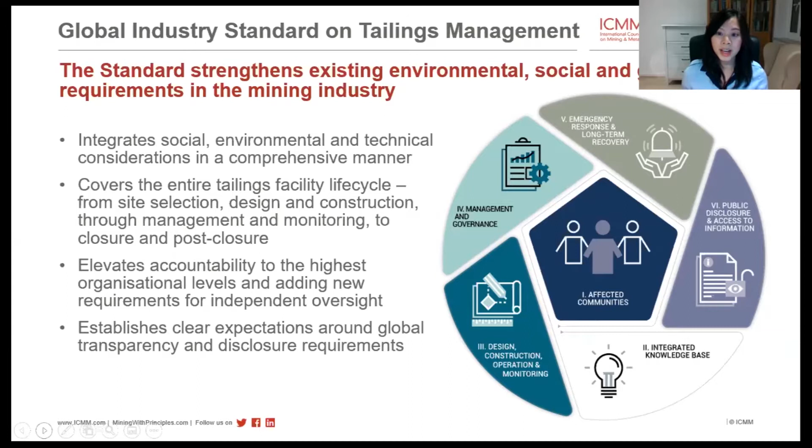In essence, the standard strengthens existing environmental, social, and governance (ESG) requirements in the mining industry by integrating social, environmental, and technical considerations in a comprehensive manner that will be new to a number of regions. It covers the entire tailings facility lifecycle, from site selection to design and construction, through to management and monitoring, and to closure and post-closure. It elevates accountability to the highest organizational levels, adds new requirements for independent oversight, and establishes clear expectations around global transparency and disclosure requirements, helping to improve understanding by interested stakeholders.

The co-conveners, having all endorsed the standard, will call for broad and effective implementation of it. For us in ICMM, it will be integrated into our existing member commitments, which includes third-party assurance and validation. Our members have signaled the commitment that all facilities with extreme or very high potential consequences will be in conformance with the standard within 3 years of the launch date, so 3 years from August this year.

All other facilities will be in conformance 5 years from August this year. Meanwhile, UNEP will support governments that wish to incorporate and build upon the standard into their national or state legislation and policies. And the Principles for Responsible Investment, which represents some $100 trillion in assets under management, will also be developing investor expectations to support companies in implementing the standard. So it's our hope and ambition that it will not only be implemented by ICMM member companies, but that it will be much more widely adopted across the world.

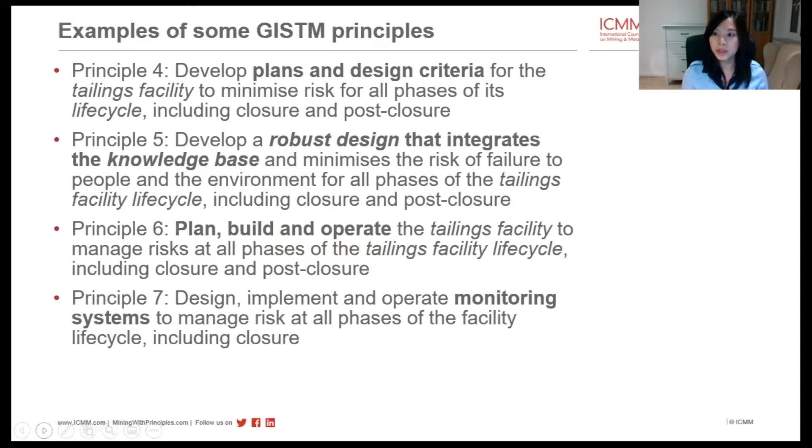I hope this gives a helpful, informative overview of the standard, and it should also be a good segue for us to think about the challenges and opportunities raised by some of the requirements of this new standard. That's all from me, and back to you, Paul.

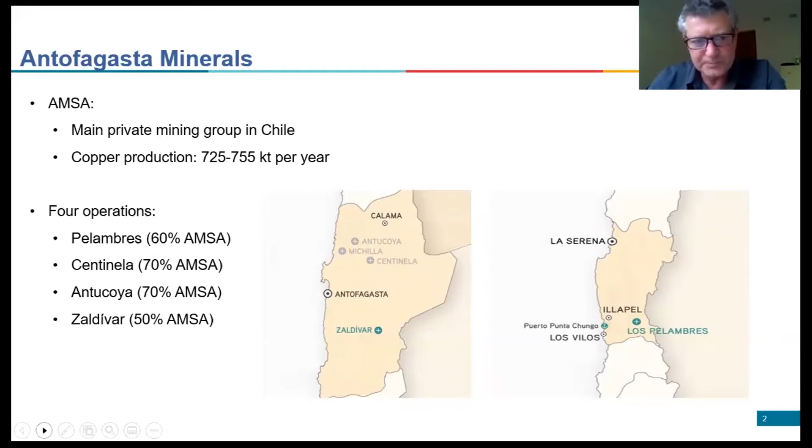Quillayes is an older tailings facility, ultimate capacity of 400 million tons. It is a cyclone sand dam. It is currently inactive. It was built with the downstream construction method and currently has a maximum wall height of about 200 meters. It's not going to go any higher than that. It's currently inactive.

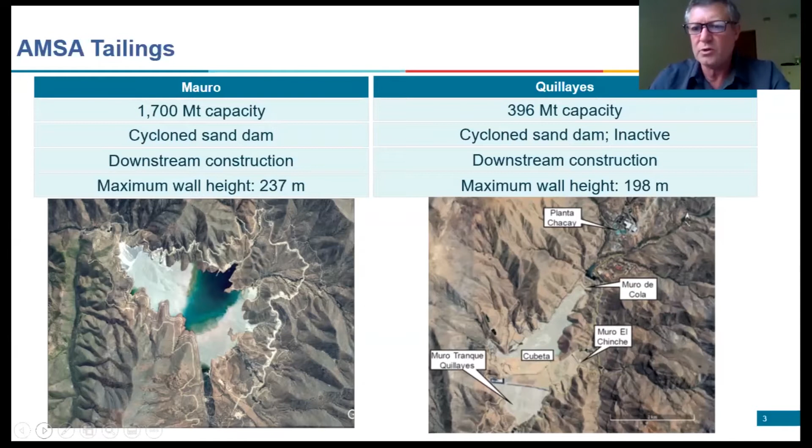Obviously, the mine is operating, and it does have an operating tailings facility called Mauro, which is on the left. Mauro has an ultimate capacity of 1,700 million tons. It is also a cyclone sand dam built with the downstream construction method, and will go up to an ultimate wall height of 237 meters. This is a significant height - close to world record heights for a cyclone tailings dam. It's not the world record - it used to be, it's not anymore. But it's pretty high up there, and obviously that carries its technical challenges.

The next facility, as I mentioned, is Centinela. This facility has an ultimate capacity of 750 million tons. It is the largest throughput thickened tailings facility in the world at 95,000 tons a day. Containment is provided by two dams - a main dam and a secondary dam. The main dam is a rockfill dam. The secondary dam is an earthfill dam. You can see here in the front the main rockfill dam. Both dams use downstream construction, and the main dam, which is the largest, has a maximum height of 80 meters.

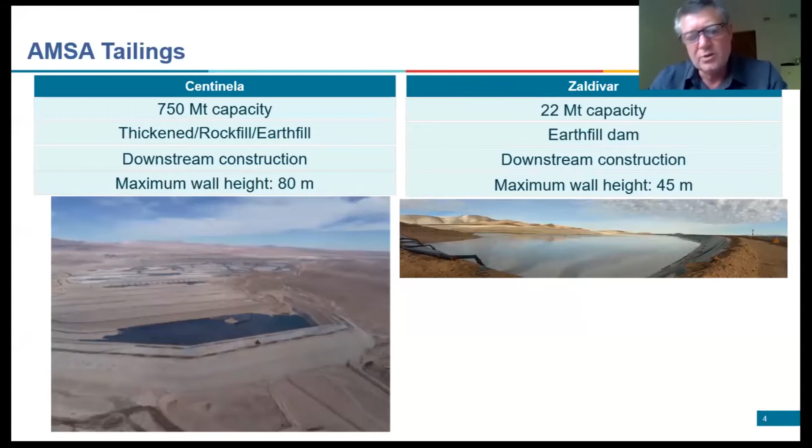I list here the main challenges that we see that are derived from the new standard. I'd like to say that AMSA participated significantly during the development of the standard,

and now obviously during the implementation. AMSA is a member of ICMM, and as we heard from Diane, we have a commitment to be in compliance within 3 years for our critical facilities. The two first that you saw, both Mauro and Quillayes, are critical facilities due to their height and how close they are to communities. So those will be in compliance in 3 years. The other two, Centinela and Zaldívar, are not critical, so we do have 5 years there.

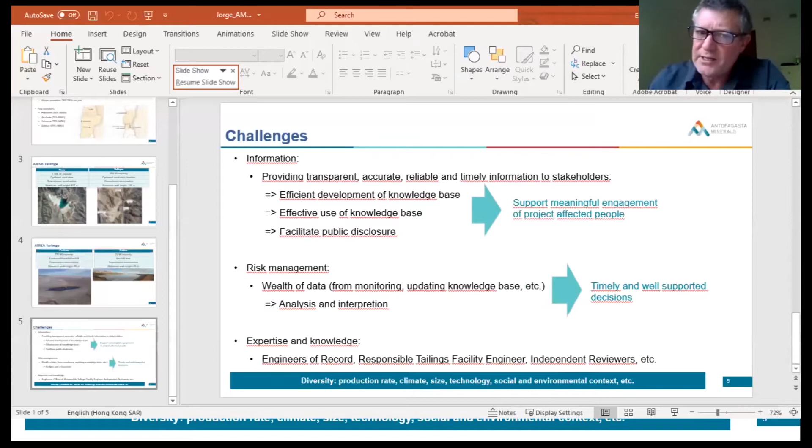But we expect to hopefully have all four of them in compliance within 3 years. Having said this, I'd like to indicate that I think most major companies like AMSA, we don't see major challenges in implementing the technical criteria associated with the standard. Yes, we will have some gaps, but we feel that we're prepared to address those within the timeframes that are established. So yes, there are challenges, no doubt, on the technical field, but we are of the view that these can be addressed, and we have the capacities to do so. And obviously, we welcome input and knowledge from service providers and new technologies to achieve that.

So we do have a challenge, but the biggest challenges are the ones I indicate here. You've noticed that Diane did bring up two main aspects that we see as challenges. The first one is related to information and in relation to transparency. One of the big items of the standard is providing transparent, accurate, reliable and timely information to stakeholders.

The information that is generated from these tailings facilities is tremendous. It's a huge amount of information. The standard requires us to be updating that information regularly, and so to be efficient about how we collect it, how we interpret it, how we analyze it. The standard also asks for updating. So we need to develop a knowledge base. We need to maybe not only develop, but we need to update it.

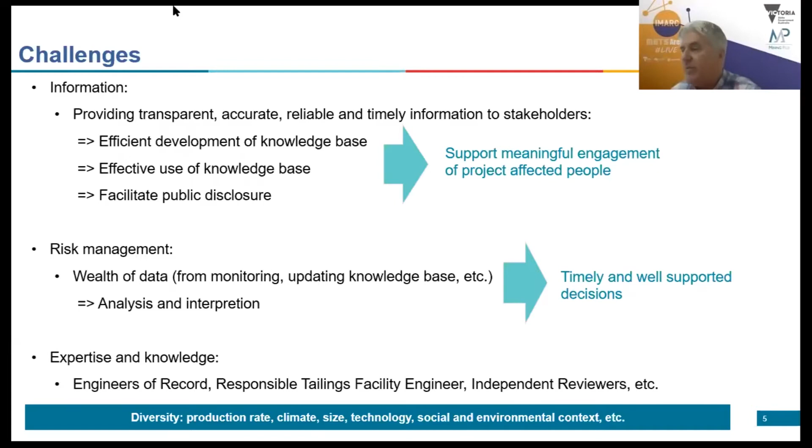The other aspect, and you saw on the 4 principles. Oh, hey, got 30 seconds. Sorry, we've got to run to a tight thing. 30 seconds, please. Yeah, almost done here.

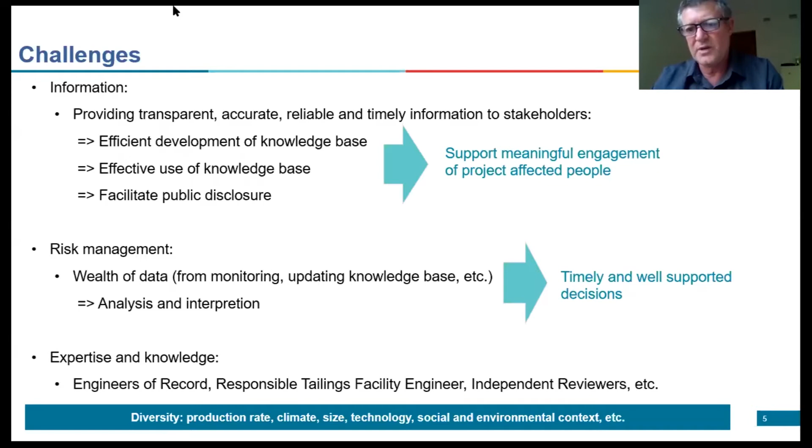As Diane mentioned, the 4 principles that she brought up talked about risk management or minimizing risk. That is another significant challenge that we see. Again, due to the wealth of information, significant amount of information, being able to analyze, interpret that, and pass that on to decision makers. Again, the other thing we heard from Diane is that accountability is brought up to the highest level within the company. So bringing that information in a timely manner, digested and interpreted for those decision makers, very high level decision makers, to make those decisions is also a significant challenge.

That's essentially what I had. Thank you very much, Paul.

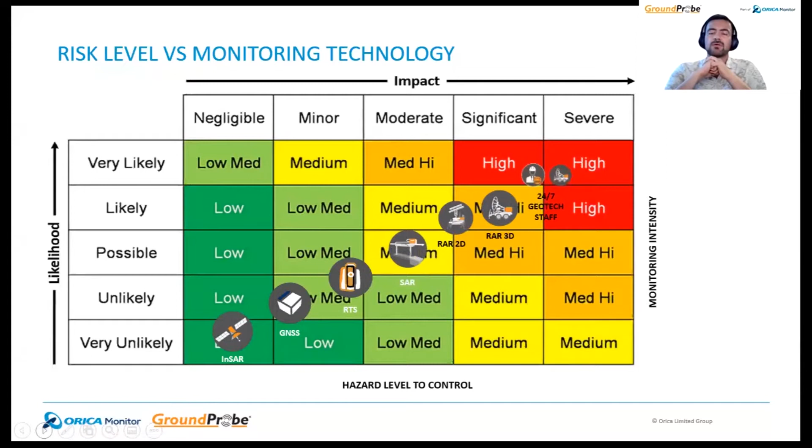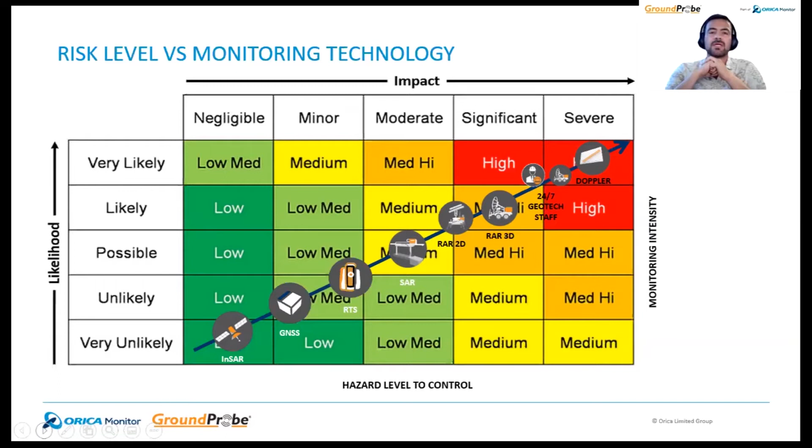At Groundprobe, which is part of Orica Monitor—Orica bought Groundprobe a couple of years ago—we have an approach to recommending technologies in open pits, underground, and civil applications, depending on the level of risk that we or the customer need to manage. We go through a likelihood of occurrence versus impact chart, the common type used in risk management, and based on the needs of the customer, we recommend a technology. This applies to many types of structures, including tailings dams.

If the customer just wants to understand the deformation conditions of the tailings dam, maybe InSAR is sufficient—if they want to know what's going on, or just want periodic checks, InSAR gives that information at a reasonable cost. But if the customer decides they need a higher level of monitoring for surface deformation, we start escalating through GNSS, robotic total stations, synthetic aperture radars, real aperture radars, and full support from geotechnical experts, monitoring this instrumentation 24/7 remotely or on site.

Finally, after Brumadinho, Vale had the need of implementing system technologies for emergency management. If there is a sudden failure, they needed a system that quickly triggers alarms so people have a few more seconds or minutes to run away from the flood. On the right-hand side are images of technologies we're using in tailings dams: the SSR-XT, for example, we use at Samarco; the SSR-SARx we're using a lot at Vale, and more recently the SSR Velox, our new Doppler radar.

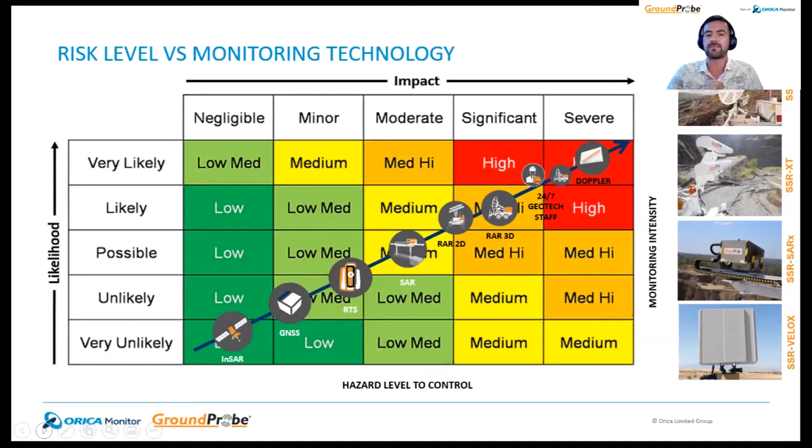These are examples of work we're doing in Brazil. We were monitoring reinforcements of upstream tailings dams—the works are shown in the image on the left. The colors represent deformation towards or away from the radar, shown in the plots. The software is programmed to allow discerning between real movement and equipment noise.

On the right-hand side, we visualize the comparison between ground-based radars and satellite on vegetated tailings dams, long projects we've been running since Brumadinho broke. There's very good correspondence between different technologies, and it's paramount to have this level of redundancy in tailings dams, given the high impacts they present if they fail.

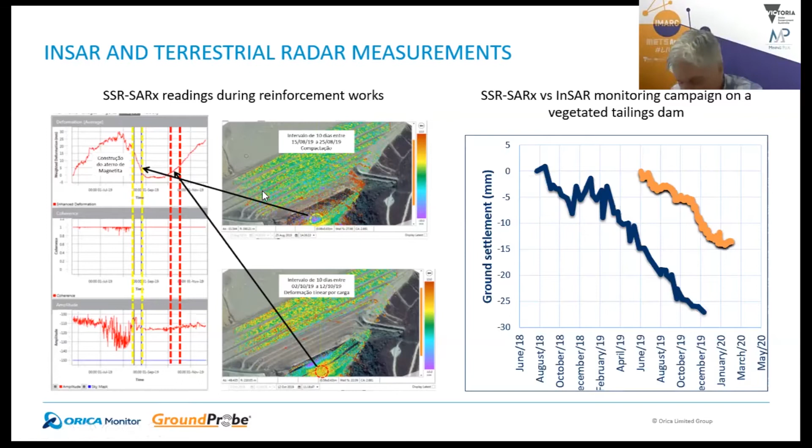Albert, thank you very much for your presentation, a great presentation. I have some questions. I worked for a mining company in Mongolia, north of Mongolia, and the temperatures were very low there, normally getting to minus 50 or so by the end of the year. How does the technology work in those harsh weather conditions?

Okay, we have our radars designed to work in extreme cold weather conditions. We also work in Mongolia, northern Canada, and more recently in China, Russia, and Kazakhstan. The temperatures the radars work at over there can reach ranges from minus 40 to minus 60 degrees in the more extreme conditions, and we developed mechanisms to keep them warm enough so they can continue working in such environments.

That's for the equipment. In regards to the signal and the capability to measure displacements at such temperatures, there's no impact from the temperature - it's more the mechanical components that we need to keep warm. It's a problem solved from years ago for us.

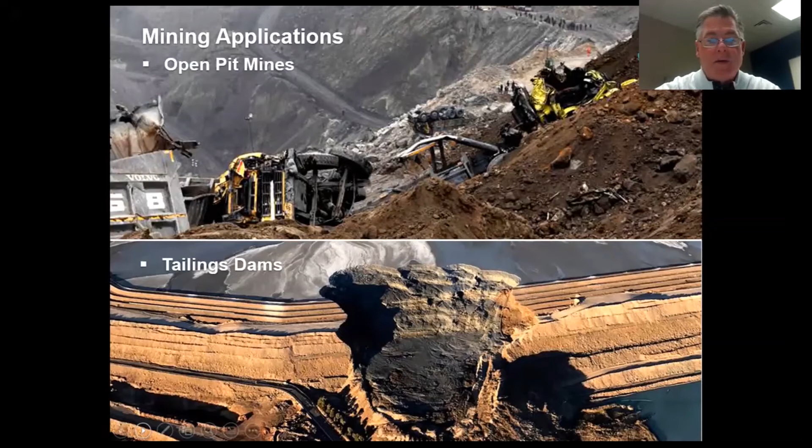Hawk's fiber optic sensing for tailings dams uses a light source sent down a fiber optic cable, giving a continuous measurement throughout the whole cable. The light source is diffracted, causing a backscatter where there's an event such as a temperature change, a vibration, or stress.

Hawk's technology uses the stress measurement to determine slope movement. The fiber is placed downhole through the structure of the wall to monitor the strain, detected by monitoring diffraction of light within the glass of the fiber optic cable. We use time of flight to determine exactly where the strain is occurring.

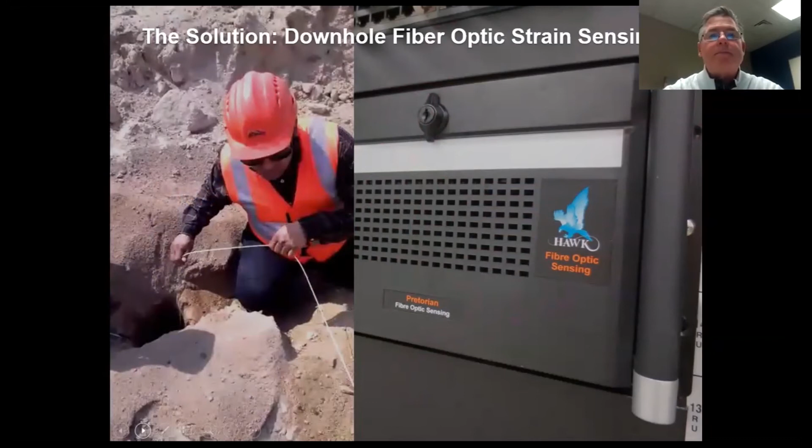Geotechnical slope analysis is conducted to identify the critical slip. A borehole pattern is designed to intercept the critical slip plane and monitor the strain we see in the field.

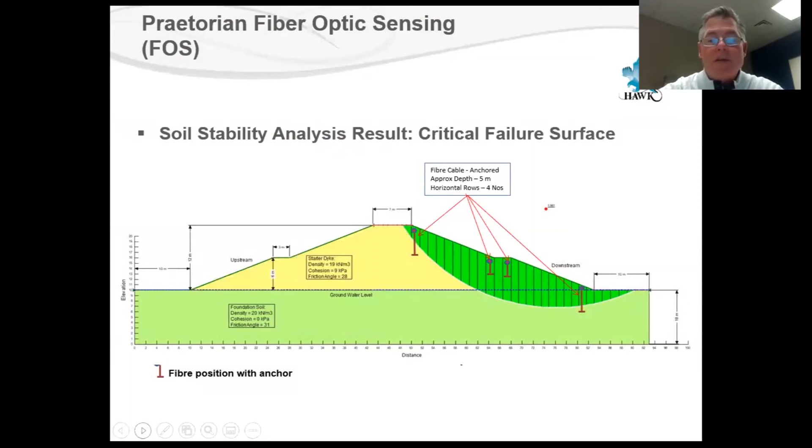As an example, this is a simulation of strain in a slope during failure. Strain accumulation can be detected both before a failure and during a slip event.

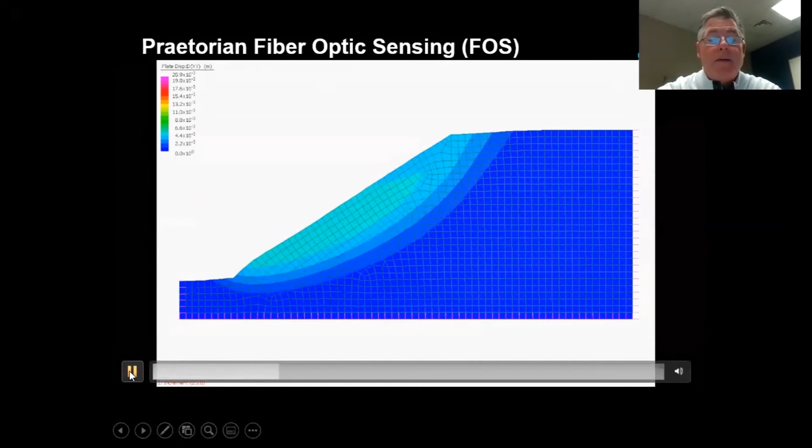Some of the technology advantages for fiber optic would be 24/7 monitoring - the system provides unattended operation and is maintenance free.

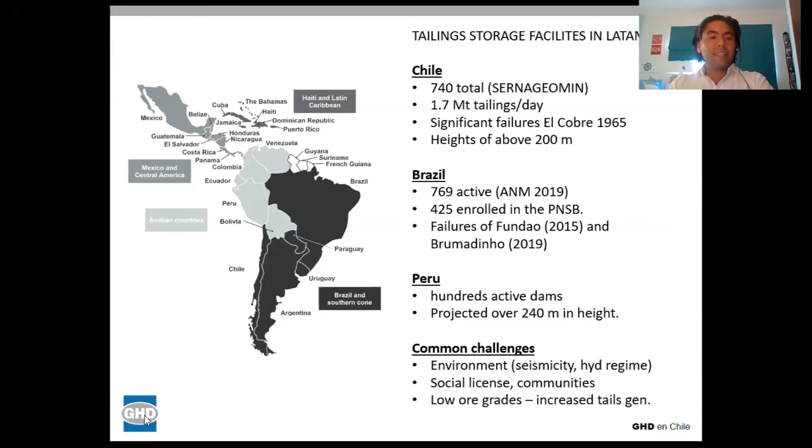Next one, please. In light of the recently released standards, such as those presented today by ICMM, we as Latin Americans have a global challenge to face regarding tailings management from construction to closure.

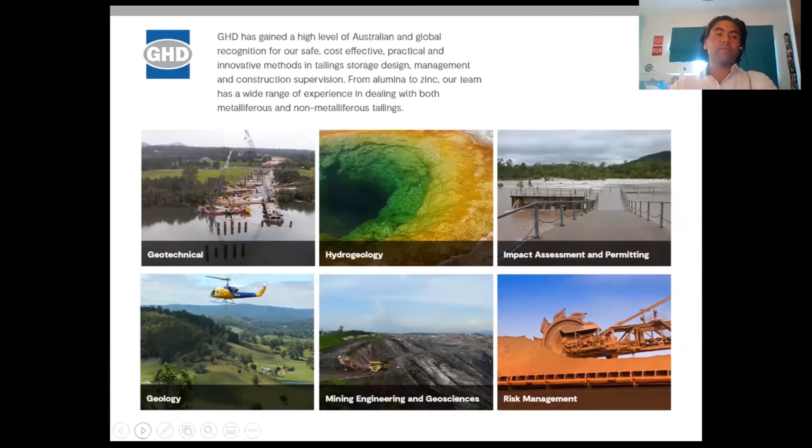Next one, please. As GHD, we want to support our clients with these current and coming challenges. We've gained global recognition for our safe, cost-effective, practical, and innovative methods in design, management, and construction supervision. Our approach for tailings management, next one please, is based on concepts of risk management, governance, organizational stewardship, review and assurance, surveillance, and integration of new technologies such as paste or filter tailings. Our experience in tailings is large in Australia, New Zealand, and the Philippines, and now incipient in Latin America. In this context, in addition to current projects conducted by GHD worldwide, we've just signed a framework agreement for engineering services for water and tailings with our local copper producer, Codelco.

Regarding this, we strongly believe that the future in mine waste engineering services is bright for GHD in Latin America. Thanks, Paul, it's back to you.

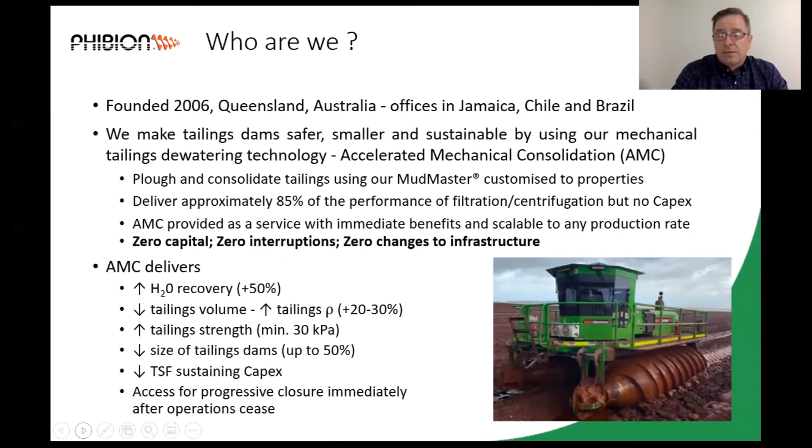Next slide, please. So here's a little bit of a time lapse of a copper operation. And what you see there on day one is that tailings were placed in a layer of a particular depth, and we commenced our operations.

What we do is we plow from the point of discharge to the point of water collection. We start to create these surface channels, we call them scroll lines, and we repeat this process several times. As you can see in that sequence, on day 43, we've effectively finished. And we know that because we walked out there and had a look.

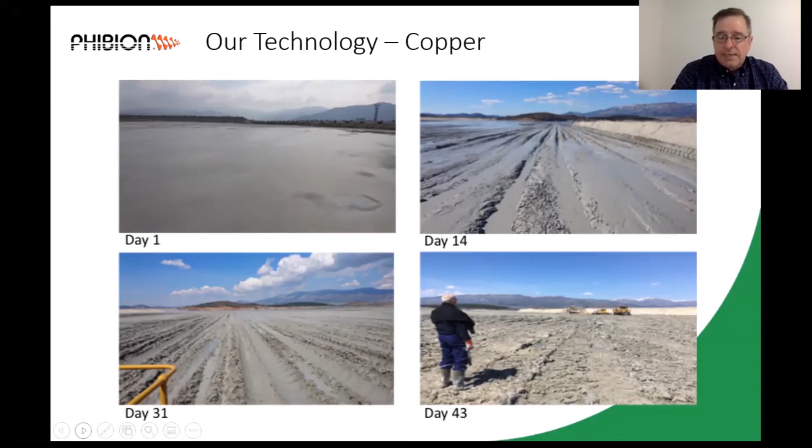And when you start talking to clients about being able to safely access your tailings area within a number of weeks, as opposed to leaving it for considerably longer, it changes everything. Next slide, please.

So where can we help in Latin America? There are significant and large mining operations. You have large risks like everyone else. But of course, for Latin America, water is critical. And that's one thing that we can give you.

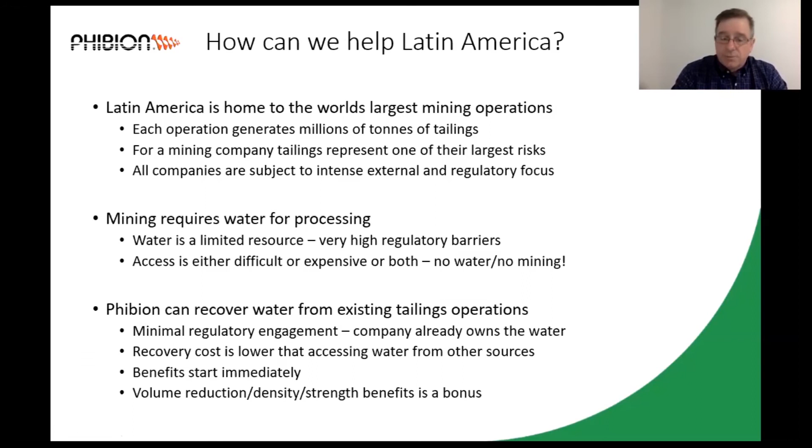So we can recover water from your existing operations. We recover it from your tailings. And we do it at a lower cost than you can obtain fresh water from other sources. But you get all the benefits of tailings management for free, so to speak. So we'll reduce your volume, increase your density, and give you strength. That sounds like a very good bottom line.

Over to you, Alex. Questions and comments? Yeah, it's a great technology. Thank you, David, for sharing that. I had the opportunity to see Phibion before, and I thought it a great solution for tailings dams and other applications. And what are the biggest challenges you see to implement this technology here in South America?

The biggest challenges? We're suggesting something of a radical solution, which means that we need to bring our clients on a bit of a journey. And we do that primarily by doing trial operations. So we have a machine enter into the site. And because every tailings is different and the performance that we can get from every tailings is different, we need to come up with a unique solution for each site. But that can be done within a matter of months, and with all of the benefits that I described earlier. Once you have that base information, it is very easy to extrapolate that to a whole of site solution.

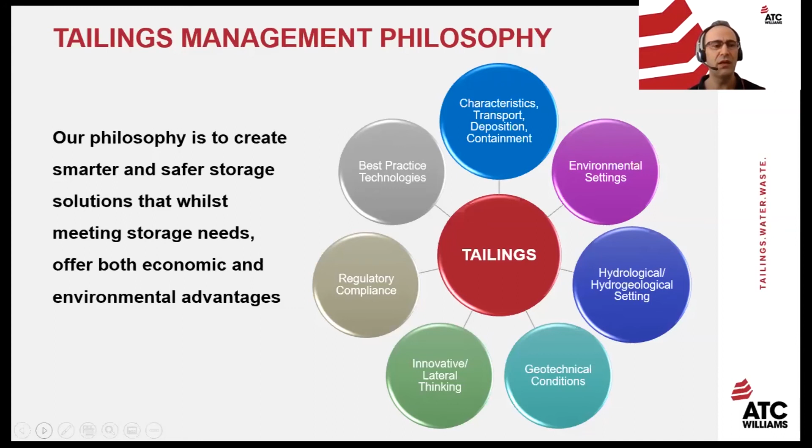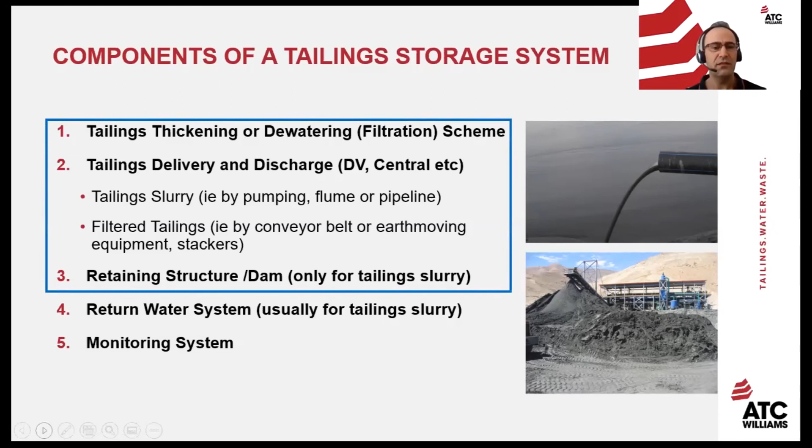There are several stages of a TSF life, as you all know, and each stage should be adequately taken care of for the best and successful outcome. You may have the best design, but if it's not constructed properly, then we have a problem. If it's not operated properly, we have problems. Everything needs to be taken care of for all stages of the mine for the TSF life cycle, and the performance should be considered from cradle to grave. The earlier we get involved, the greater value can be added to the project.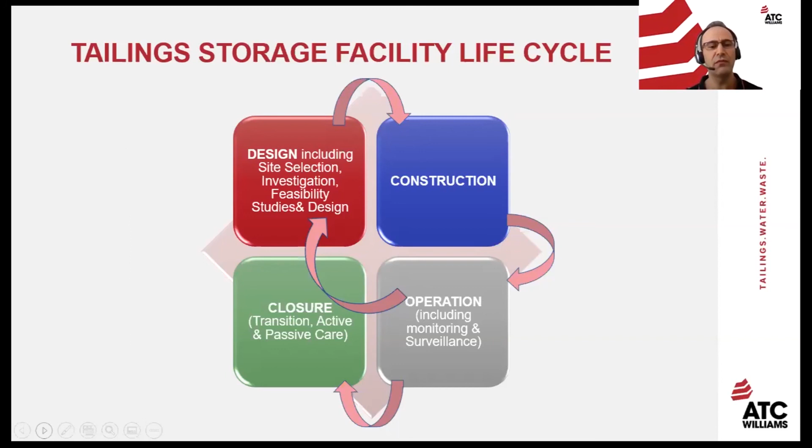Next slide, 30 seconds, Barris. Okay, no, I'm almost done. Thanks.

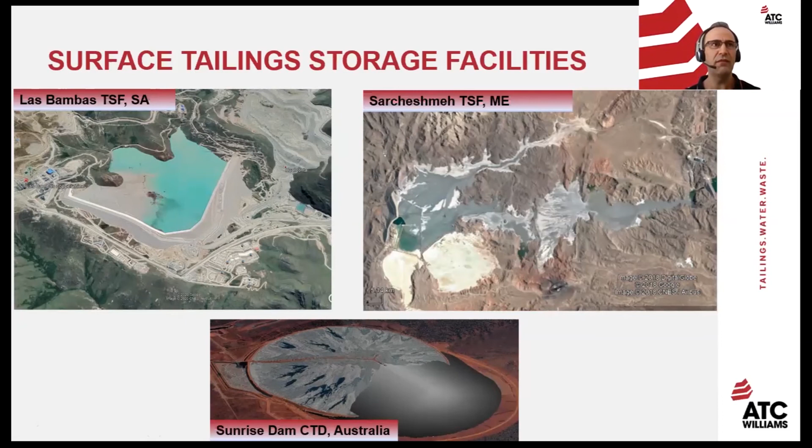Depending on various considerations indicated earlier, including site constraints, the tailings solution may vary. You can see in this image we have a cross valley tailings dam with 1 billion tons of tailings storage at Sarcheshmeh, a plus 200 meter high tailings dam at Las Bambas in South America, and the central thickened discharge scheme at Sunrise Dam in the bottom picture. By the way, we were the pioneers of the introduction of the central thickened discharge scheme in Australia. That's all I have at the moment—if there are any questions, I'll be happy to take them.

Yes, Alex, thoughts or questions? Yeah, Barris, thank you for your presentation—very good presentation. I have a question here, something important for Jorge at Antofagasta Minerals or any other mining company with TSF facilities. For example, with the dams near Minas Gerais in Brazil, you have TSF facilities that take 40, 50, 60 years from commissioning to closure. How do you see the management of this process over that time, given that people join companies and leave, information changes, and technology changes?

Yeah, that's a very good question, Alex. We see all the time people changing, but I believe that's the purpose of all this governance structure which has been introduced recently, even through ICMM. If the governance is there, change of people shouldn't make a huge difference. We can see that governance is playing a major role in the way things are operated. So I'm sure in any mine several people change, and even the mine itself can change hands, bought by others—but if you have a proper governance system, that's going to be taken care of.